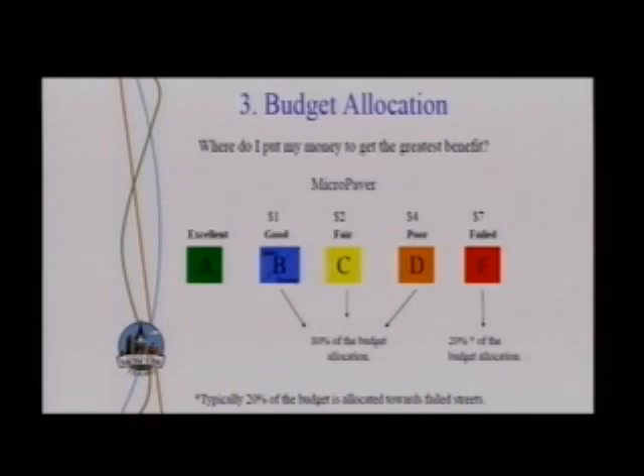As many on the council are aware, we have made big efforts to keep our good roads good. It's something that we really have to do if we hope to have an acceptable level of service for our roads. This chart basically shows what it costs in each category for treatment. For every dollar that we can spend keeping a good road good, it costs about $7 on the back end to fix a failed road, to go in and completely reconstruct a road. And we have a huge investment in this infrastructure. And so our philosophy is that we really want to try and do surface treatments and treat our roads, maintain our roads.

I know that we've used the analogy before of the oil change in a car. It's the equivalent of changing the oil. You don't buy a car and drive it until the engine blows up and then buy a new engine or buy a new car. We want to do the oil changes, maintain the car that we have. And it's the same thing with any maintenance procedure, anything you do at home. You don't wait to re-roof your house until it's dripping into your kitchen and then tear it all down and put a new roof on. You put new shingles on when they need to happen. And it's the same thing with the roadway system, because water really is the enemy to our roads. So keeping them sealed up and keeping water out of our base section is really important.

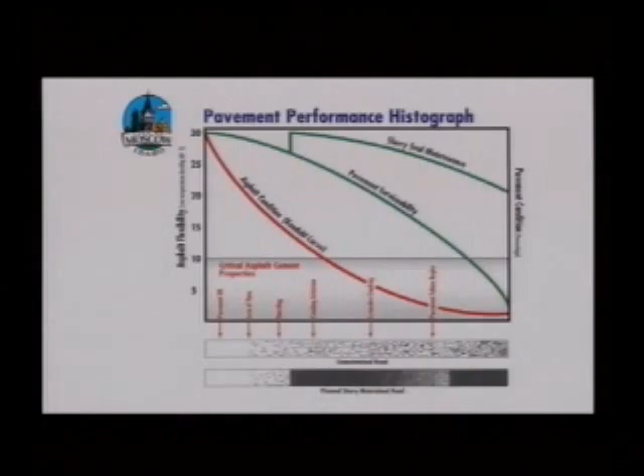This is called the Kendall curve. It shows that if we just put pavement down and we let it go, this is the curve of degradation in the pavement. And down here it shows what you start to see on the surface. The cracking, which then turns into potholes, which then turns into Almond Street. And so what we want to do is treat the roads and keep them sealed up so that we can prolong this.

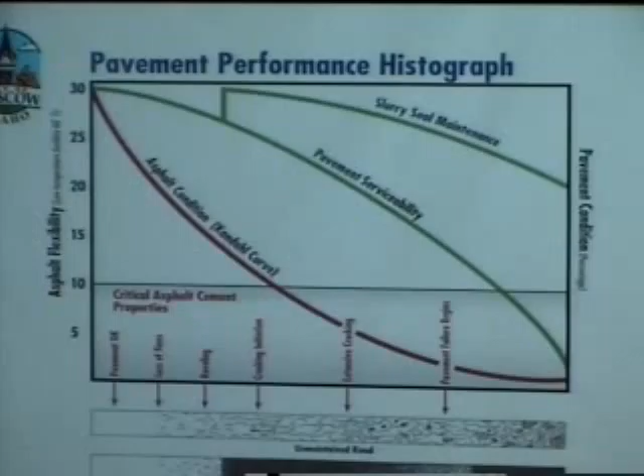And we really have to, because I know you are all very aware, funding our road maintenance is a terribly difficult thing. It's not like our enterprise funds where we can charge a fee for what we do. Often the general fund is having to supplement as much as it can to try and help us eke out what we can. And so our commitment is that every dollar that we can get, we know that Gary and Finance and Les and everybody's worked really hard along with the council in the budget formulation process to get us every one of those dollars. And so we want to spend it effectively. And that's really the goal of our program.

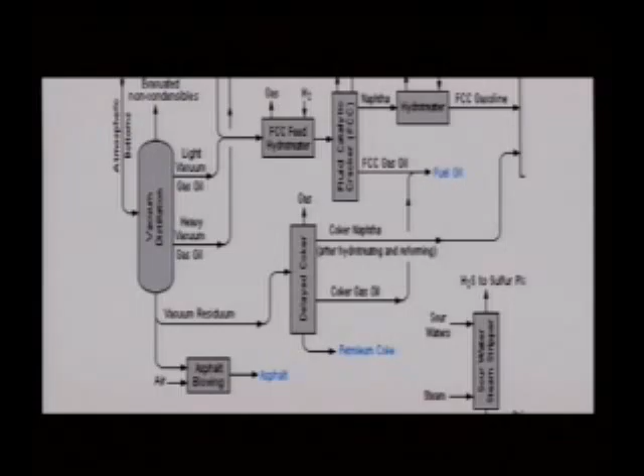Once it's down, we've got to maintain it and keep it in good condition. Another thing that happened that I'll just touch on really briefly, a lot of times we get the question that, oh, now that gas prices are cheaper.

Is there going to be a quiz on this? There's going to be, yeah. Yeah, you have to recreate this. We're going to bring out a whiteboard.

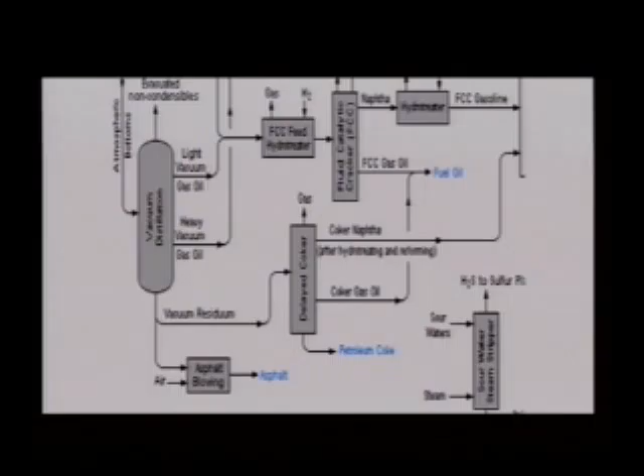First thing I thought, when I first saw this thing, I thought, what is this, some kind of a distillery for liquor? That's exactly right. This is an oil refinery. So there are funner versions of distilleries, and this is not the most fun one.

But with the oil refinery, what happened was when gas prices spiked, and I only bring this up because we do get the question, now that gas prices have gone down, does that mean that we're going to see significantly lower asphalt prices? And the answer is it won't follow exactly what the gas price is doing, and this is why.

There's this piece of equipment that was installed. It's called a delayed coker. And really about $3 a gallon was the threshold for the oil companies to make that a worthwhile investment. And so when we had the big spike in prices over several years, most of the refineries have installed this coker. And so what used to come off vacuum distillation was asphalt oil.

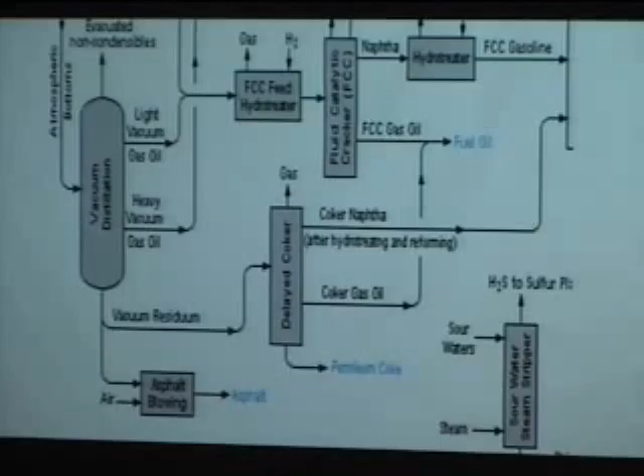And so we got everything that came off the bottom of this vacuum distillation. It was a waste product. Now that the coker is there, they have the option to either send it down and we get the asphalt oil, or they can send it back through the coker and they can come up with fuel oil again. And so really the asphalt industry then has to compete with the fuel oil industry now for any emulsion that we get. And so it's really affected the price that we'll pay moving forward for this.

One very helpful thing, as was discussed during the audit, the Idaho Senate did approve the gas tax increase, and so we saw an increase of a little over $200,000 that goes into the street fund. I'm going to move into our proposed projects for 2016 for the surface projects.

Many of you may recall who were on the council last year, there was a project that was put out for an asphalt rubber chip seal. It's a process that we've been investigating for the last 3 years now. Our Public Works Director, Les McDonald, Kevin Lilly, our city engineer, and myself have gone out to do site visits, along with Scott Bontrager, our assistant city engineer. And we're very encouraged by this.

We have a toolbox that we can use, and we've had quite a few tools that we can use on the better end of where roads are at. And so when roads are in better condition, we have options for treatments that we could use. But we had a pretty big gap of roads that we had to put in a category that we called pending rebuild. So they weren't awful yet. They weren't falling off the face of the map, but there just really wasn't much we could do with them.

And so the AR chip seal was something that we were very encouraged by. It was a process that was developed that I'll go into here a little bit and talk about. It developed in the Southwest and it's starting to move inland, and we had some good examples of where it has been used in freeze-thaw climates, which had been kind of the obstacle because no one really wanted to be the guinea pig in a freeze-thaw climate. And the Tahoe area became that guinea pig, the Lake Tahoe area in California. And so it started to move inland.

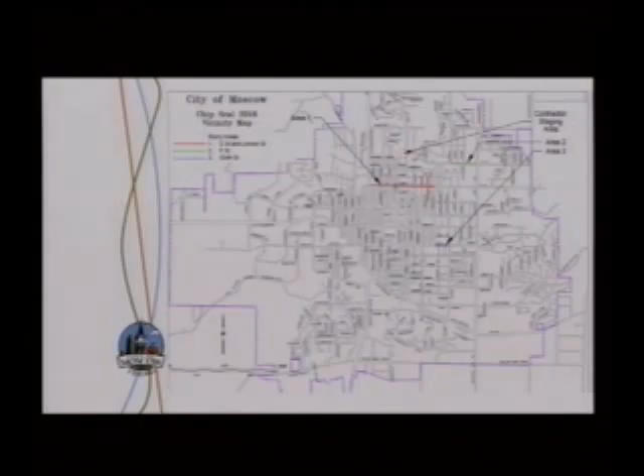So this is a vicinity map of the chip seal locations that we were proposing for the asphalt rubber chip seal. D Street, this goes from the highway all the way to Hayes, and potentially we might move a little beyond Hayes, and then within this it shows Lincoln Street as well, this stretch of Lincoln going from B up to E Street. And this is an image of the condition.

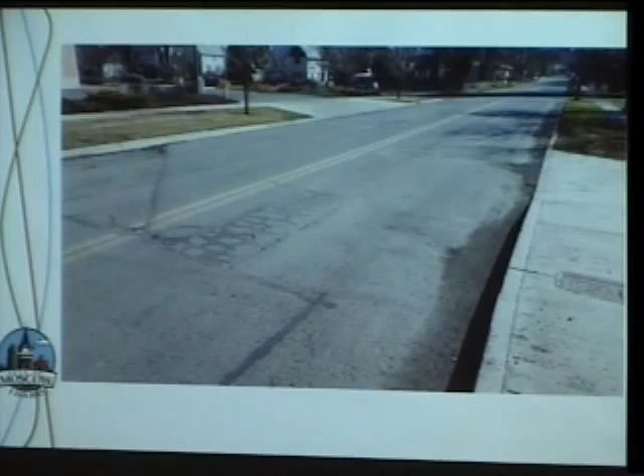And as you all know, D Street's a really critical facility. We talked about the lack of east-west connectors through our city, and this is a very heavily used facility. And so it's something that would be a massively expensive rebuild, very disruptive, but if we can preserve it at this point, we're really excited to be able to do that, and we think that this is a really good candidate for this treatment. The other stretch is a stretch of F Street.

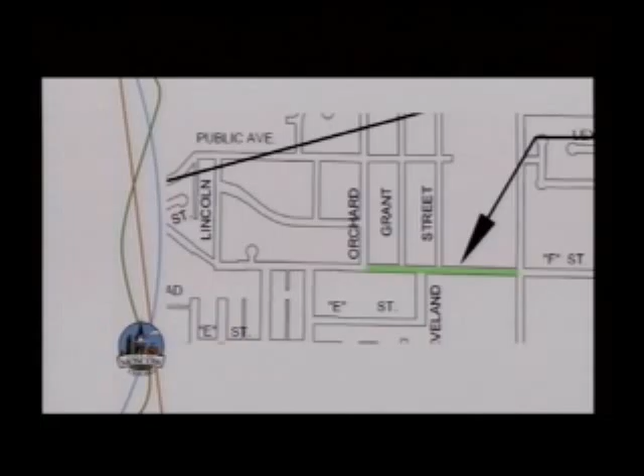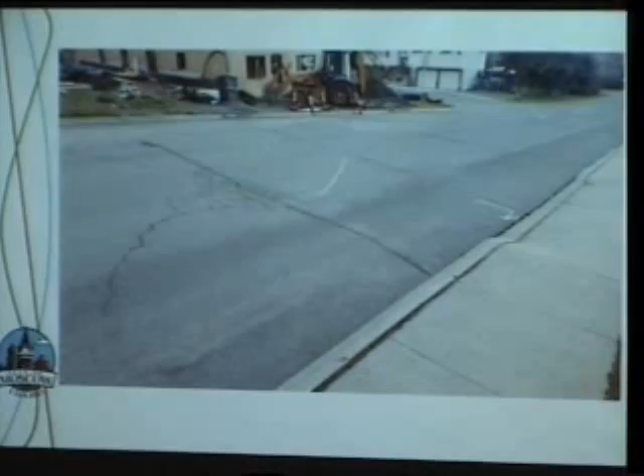This goes from Orchard down to Mountain View, and similar conditions, as you can see. We've got gator areas, we've got transverse cracking, we've got patches from various construction and repair projects. And then a stretch of 6th Street. Same kind of deal. You guys are getting the feel for this by now, I'm sure.

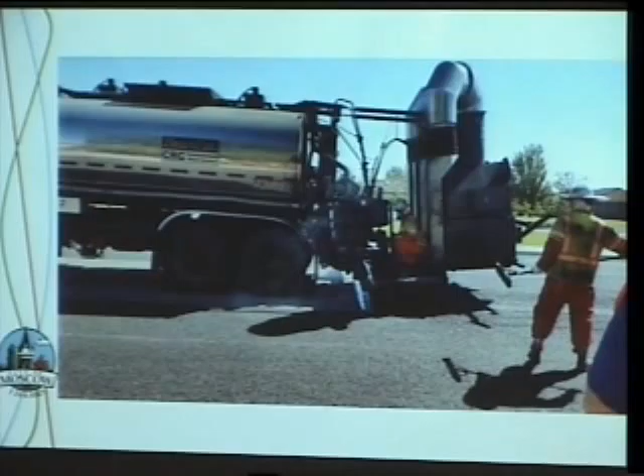So this is a rubberized chip operation. These are images in a video that we actually took ourselves. The city of West Richland in the Tri-Cities area did a large asphalt rubber chip project last year that we were able to go out and watch the procedure. So this is an emulsion truck, and really one of the big differences that we get out of this asphalt rubber is it really forms basically a membrane that goes over the road that's very flexible, and that's why it's really attractive for cracking. The cracks don't reflect through because of this membrane that forms.

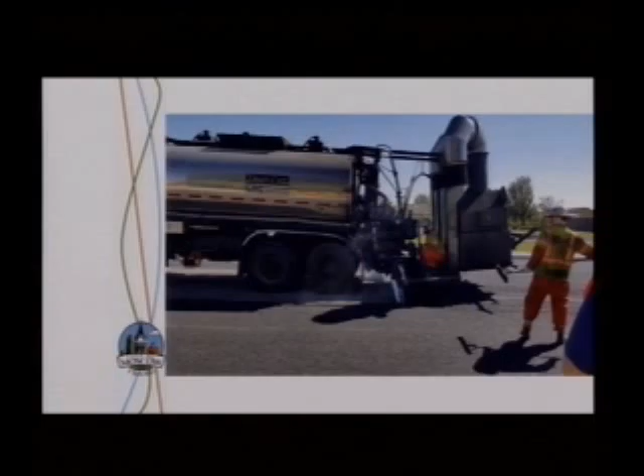And the way that that's done is it's done with a chemical bond. It's a recycled product. They use used tires that they grind up for the rubber, and then it's integrated in this product, and it's put down at such a high temperature that you get a chemical bond that forms this membrane. And that's really the attractive part. So this is a pretty typical emulsion truck that would apply it, but this is the difference here. This big unit on the back heats up the emulsion as it puts it down, so it goes down very hot at over 300 degrees. And so this is a stretch of road where it's been applied.

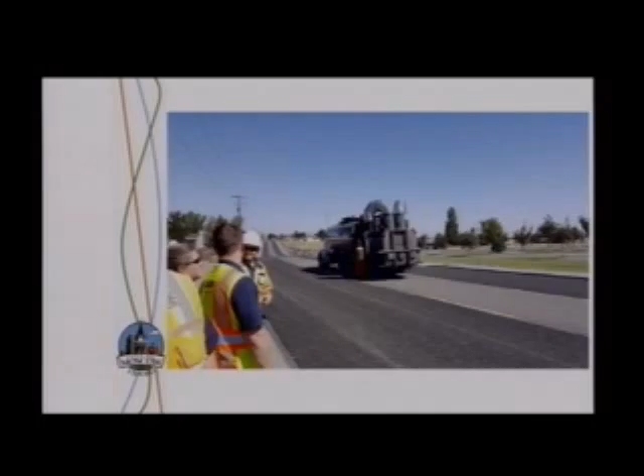How thick is it, Tyler? The emulsion or the final product, Walter? Final product. The final product is about like a traditional chip seal. So you're talking about half an inch. Thickness of your chips, basically. Yeah, it's basically the thickness of your chips. The emulsion goes down quite a bit thicker.

How many gallons per linear foot? I mean, when we do a normal chip seal, we're at a half gallon. This is usually shot at about 0.65, is usually where they're shooting this. It's really deeply embedded, and the interesting thing, we'll set up some field trips for anybody who's interested when this is in town.

We have a lot of people through our street maintenance co-op that want to come see it from the region, because this is a first project in our area. But it doesn't shed much rock at all. It's pretty amazing, because one of the hard things about a chip is that you shed rock, especially in an urban area. We shed rock when we have curb and gutter. We have bicyclists that just hate it, and you'll be amazed at how little rock this actually sheds.

It's pretty impressive. Are they applying the rock with a chipper? Yes, they apply the rock with a chipper, so the chipper will come right behind. I've actually got a video, and I don't know why it's not pulling up on this, that I can show anybody who's interested in the aftermath. But so they'll apply. It's very traditional.

The rock will come. It's really important that the rock stay right on the heels of the emulsion truck, and then they'll come over it with a roller. They'll have the rubber tire rollers, and then they'll come over with a steel drum roller, and then follow it up with a sweeper and take whatever extra rock is on there. So those are the areas that we're planning on doing with rubberized chip.

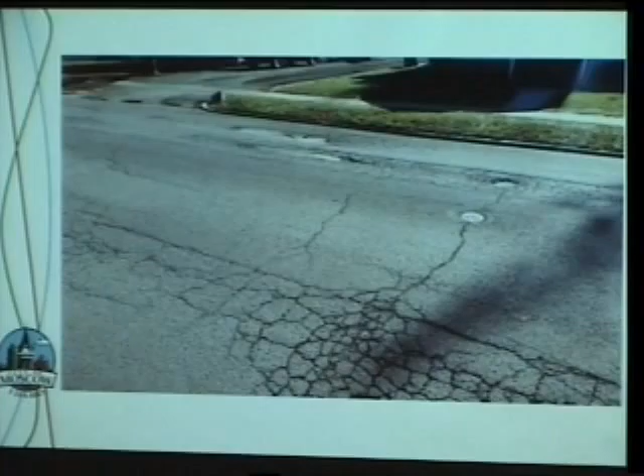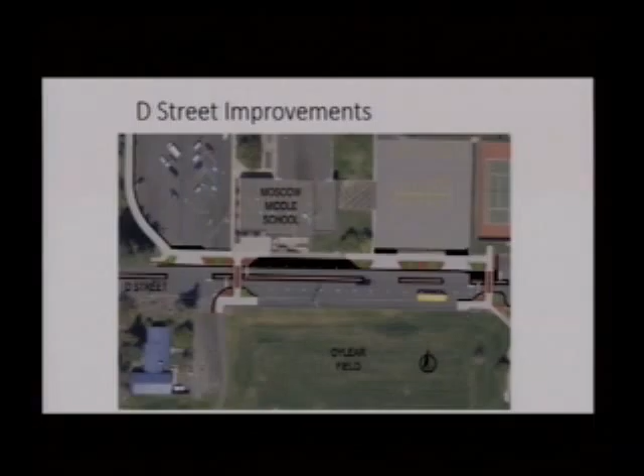We have the Moscow Middle School project. This is something we're really excited about. We had bids come in that we were happy about, and we'll be bringing to you. But this does provide a good basis of comparison, because one of the questions that we get about the AR chip a lot is, well, it is more costly. If you look at it, our slurry seal bid came in at, I think, somewhere around $1.65 a square yard, whereas the asphalt rubber chip came in at $8.60 a square yard.

So the question becomes, okay, why the one and not the other? And also, aren't you getting close to an overlay cost? Why don't we just do an overlay at that cost? There are a couple reasons that I think are important to bring up, since it is something that we hear a lot. If you take the excellent bids that we got on this D Street project, we're looking at about $12 a square yard for an overlay versus $8.60 a square yard.

And what that doesn't include is the ramps that you have to do. Because when they've set the guidelines through the ADA regulations for what's considered a surface treatment and what's considered structural, any structural work triggers the need to replace all the ramps within the project area. You can imagine something like D Street that has several ramps going up that road. We can easily add $60,000, $70,000 worth of work just in ramps. And so it is more cost effective in that regard when there are roads that it can be used for.

The other thing we have to consider is an unmitigated crack will typically reflect through an overlay at about an inch a year. So if you have any significant alligatoring, the rubberized chip is a better option for what we're trying to do. Now, there are definitely places like D Street where we will use overlays. It is a tool in the toolbox, and there are places where it's the appropriate treatment. But we're excited to have a treatment that is less expensive and that we can use on roads that we wouldn't use a traditional overlay on.